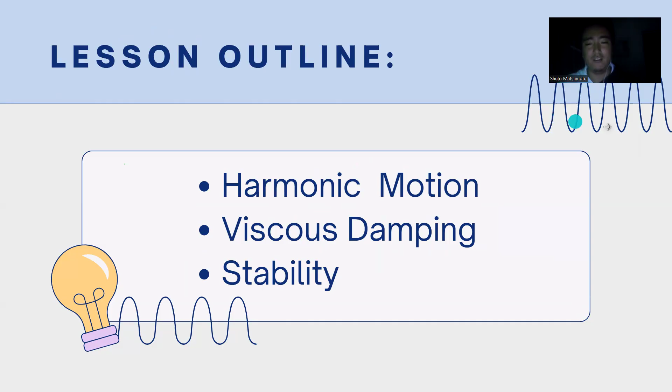Hi, I'm Gail, and I will be presenting about harmonic motion. Since the previous group already gave us an overview of what harmonic motion is, for this part we'll go more in depth. We'll look into how it actually works, how the main quantities relate to one another, and how different systems like spring mass, pendulum, and torsional system are all connected through the same principle.

Harmonic motion is a type of periodic motion. That means the object moves back and forth along the same path repeatedly. The most important part is the restoring force, since it always tries to bring the object back to its equilibrium. The force is directly proportional to its displacement, and it acts in the opposite direction. Because of that, the motion becomes sinusoidal, where it follows a smooth wave pattern, just like a sine and cosine curve.

Next, we'll see the relationship between displacement, velocity, and acceleration. These three quantities don't peak at the same time. When displacement is at its maximum, the object stops for a moment, so velocity becomes zero. But when velocity is maximum, the object passes through the equilibrium point where displacement is zero. Acceleration is always in the opposite direction of displacement because it's caused by the restoring force. The rate at which all this changes depends on the natural frequency: the higher the frequency, the faster the vibration.

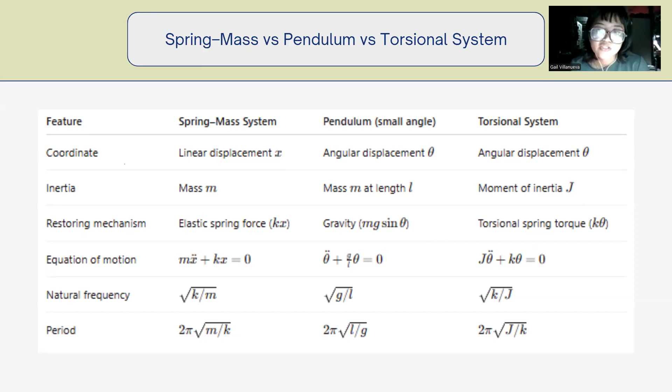For the next slide, we'll have an example problem, focusing first on the spring mass system. It says: consider a small spring about 30 mm long welded to a stationary table so that it is fixed at the point of contact, with a 12 mm bolt welded to the other end, which is free to move. The other details of this problem are written below. Suppose a spring with a constant of 857.8 N/m is attached to a mass of 49 grams, displaced by 10 mm and released. Gravity doesn't affect the vibration, it only changes the spring position. The vibration itself depends only on the mass and stiffness of the spring.

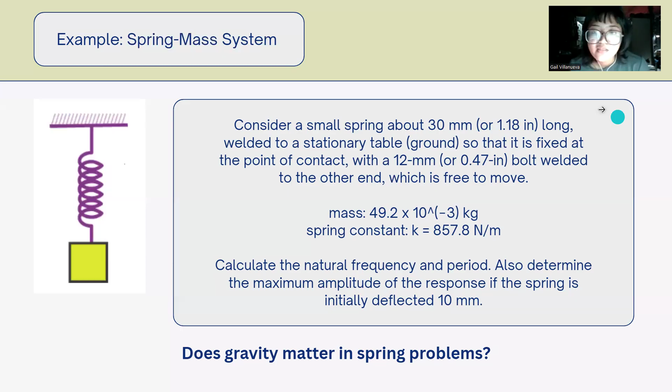On the next slide, you'll see the equation where we get the natural frequency of 132.04 rad per second, or converted into hertz, 21.01 hertz, meaning it completes 21 vibrations per second. The period amounts to 0.04 seconds, and there are the amplitude and the phase. For the equation of motion, we write displacement equals 0.01 times the quantity of 132.04 t plus pi over 2.

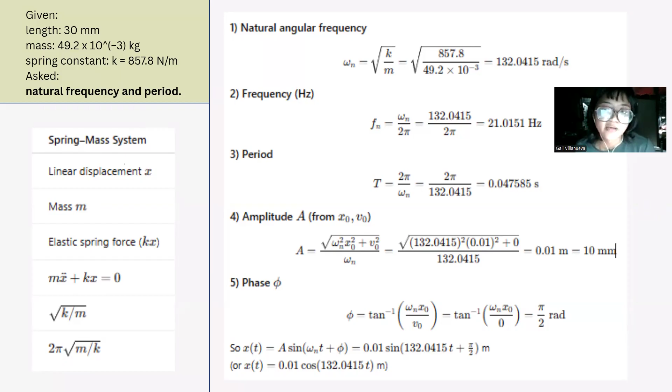On the next slide, we differentiate the three equivalent representations of harmonic motion. First is the exponential form, which is useful in advanced engineering analysis. The second is the amplitude and phase form, the most intuitive and commonly used form. Lastly is the sine and cosine form, which shows the motion as the sum of sine and cosine components. All of these represent the same physical motion, just expressed in different mathematical perspectives.

Viscous damping will be presented by Julia.

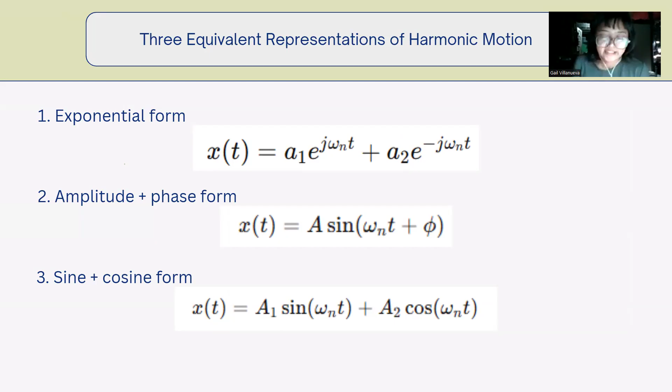Viscous damping is damping that is proportional to the velocity of the system. The faster the mass is moving, the more damping force is resisting that motion.

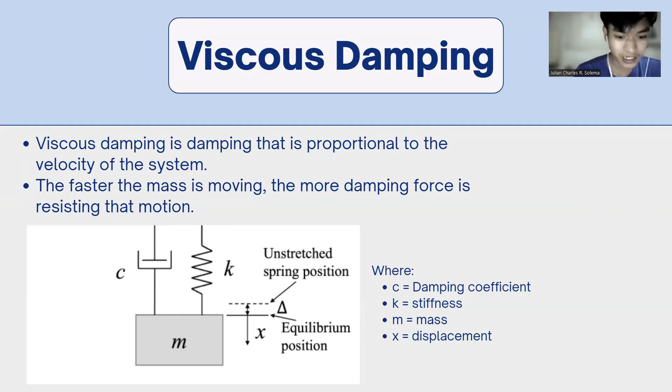So for linear viscous dampers, damping force is linearly proportional to velocity. So meron tayong equation na F is equals to C X dot. So F is damping force, C is damping constant, X dot is yung velocity of the mass.

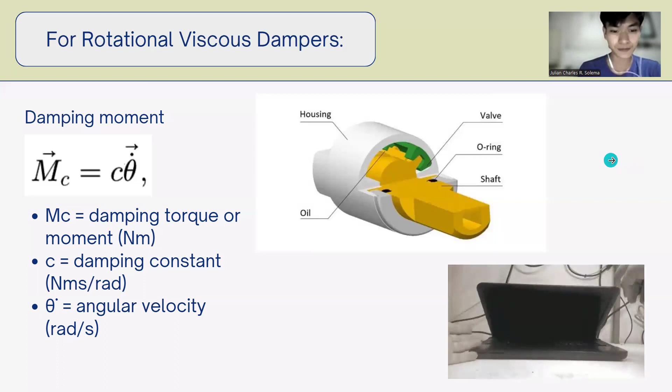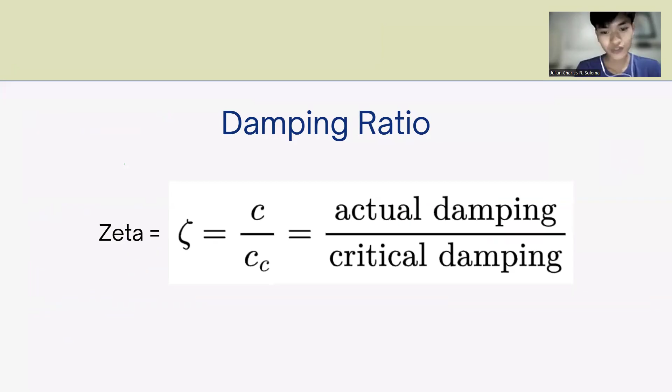So for damping ratio, ang equation dyan is zeta, which is ayang symbol na yan. Zeta is equals to actual damping over critical damping. Next.

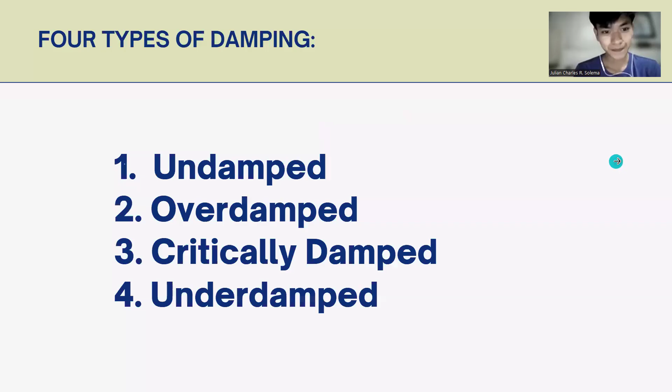So meron tayong 4 types of damping. First is undamped, overdamped, critically damped, and underdamped. So for zeta is equals 0, undamped yun. So undamped systems oscillate about the equilibrium position continuously unless some other force is applied.

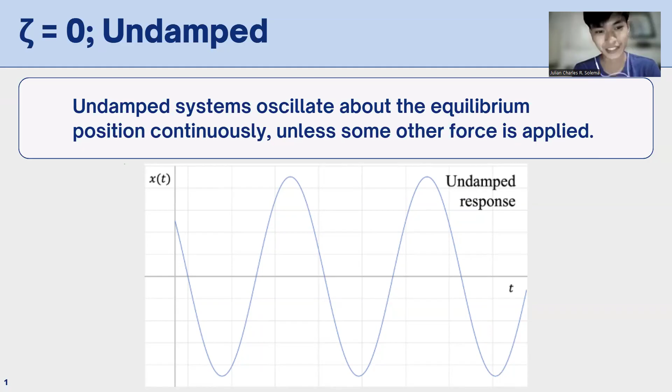Zeta is greater than 1, overdamped. Overdamped systems move slowly towards equilibrium without oscillating. So next, may example to.

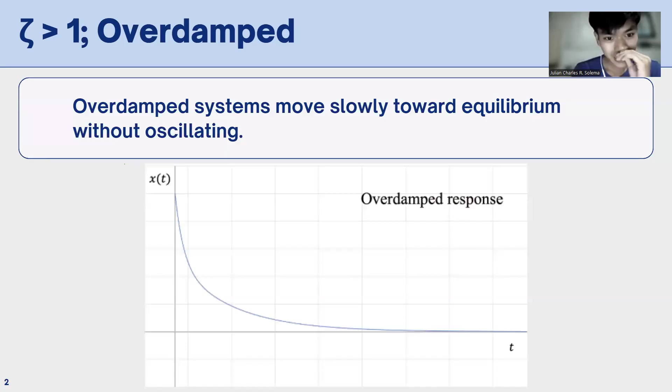Next pa. Yan, so pag zeta is equals to 1, critically damped systems will allow the fastest return to equilibrium without oscillation. So same lang siya dun sa overdamped, pero ang pinagkaiba dito is critical. So parang instant yung damping response. So next yung example.

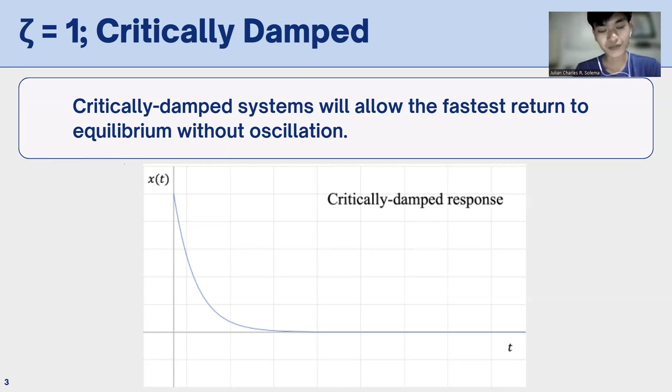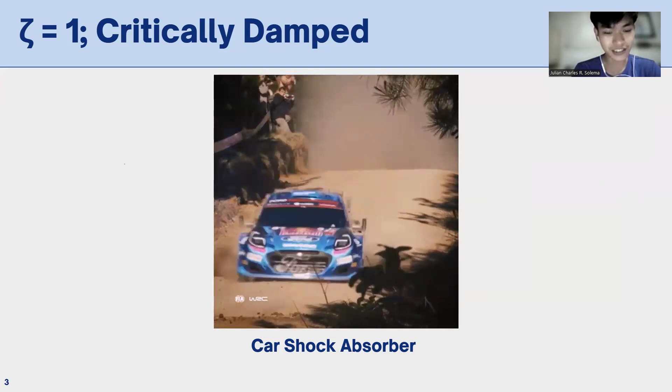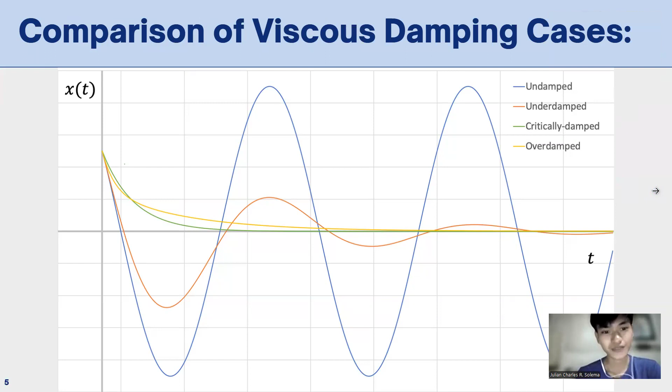So I'm Shuto. So first is what is mechanical vibration? So the mechanical vibration refers to the oscillation of a mechanical system around the equilibrium point. So we have the various factors. First is the rotating or reciprocating machineries.

So the example of this is the engines or the motors, which is naikot siya, which causes vibration. Then impact forces, this is obviously the hammering or drilling or the shocks. It also causes a vibration. And fluid flow.

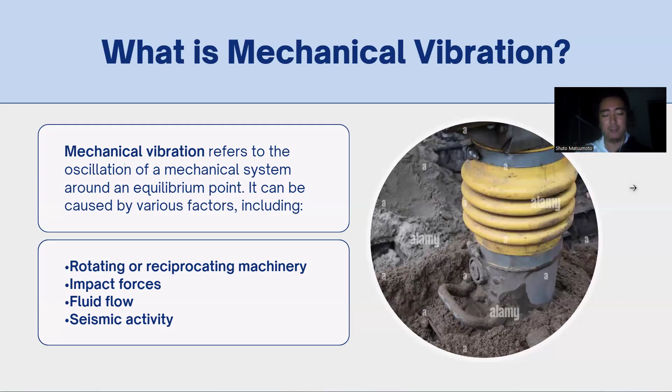It causes the ground to shake. Then it affects the machine that we have or the place that we have. So it causes a movement or vibration. And then, so why is vibration stability important?

So first is by analyzing the vibration, we learn about the safety causes or yung mga dangers na pwede nating makuha. Then preventing damage, so it is connected to the safety, which is by knowing what causes the vibration or the stability. Pag kasi masyado tayo unstable, then yung machine or yung gamit is masyado gumagalaw, then masisira lang po siya.

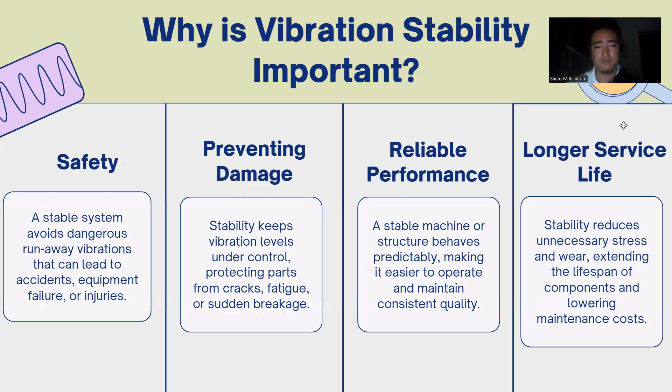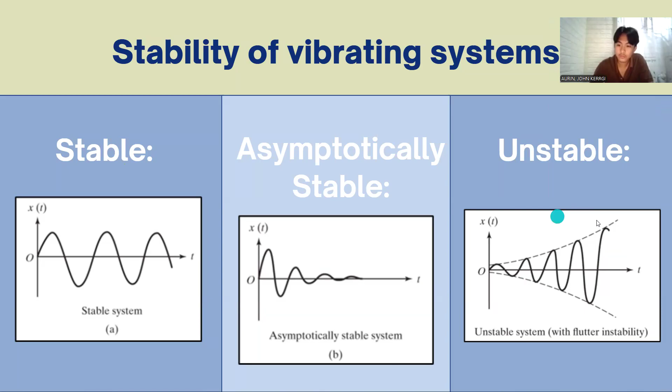My name is John Kerrgi Aurin. Now let's proceed to the stability of vibrating system. Ito yung mga classifications para masabi natin ang isang bagay ay stable or hindi. First is yung stable system. Next slide.

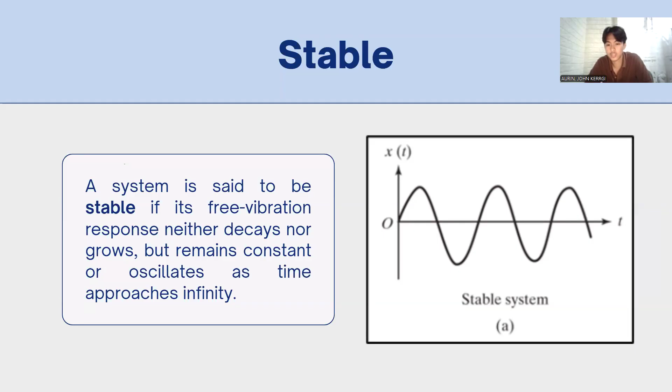Stable system. A system is said to be stable if its free vibration response neither decays nor grows, but remains constant or oscillates as time approaches infinity. Para mas maintindihan natin, magbigay tayo ng example.

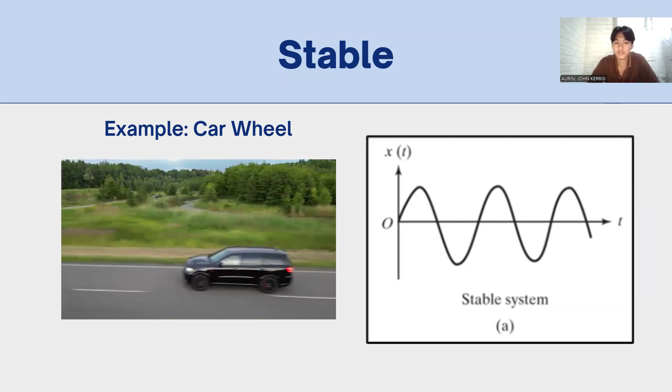Imagine a perfectly balanced car wheel. Even if it vibrates a little, the vibration stays the same. It doesn't grow or die out. Para lang siya nagdadrive ka sa isang highway with proper aligned wheels. Sa madaling salita, constant lang yung vibrations nito.

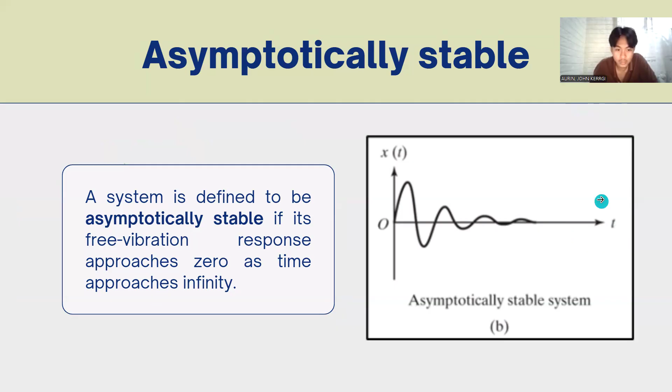Next is yung asymptotically stable system. A system is defined to be asymptotically stable if its free vibration response approaches zero as time approaches infinity. Example, yung kotse mo ay aksidenteng napadaan sa pothole or humps. Okay, drawing natin.

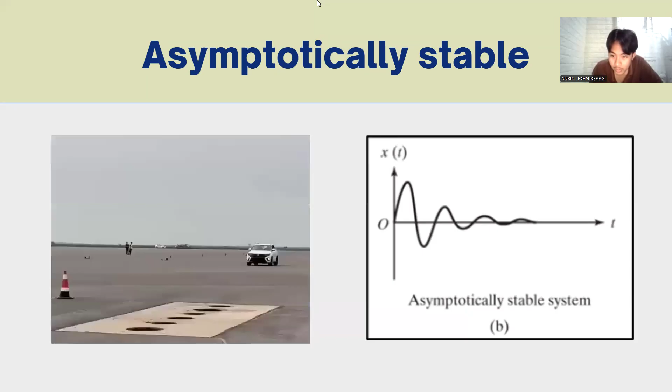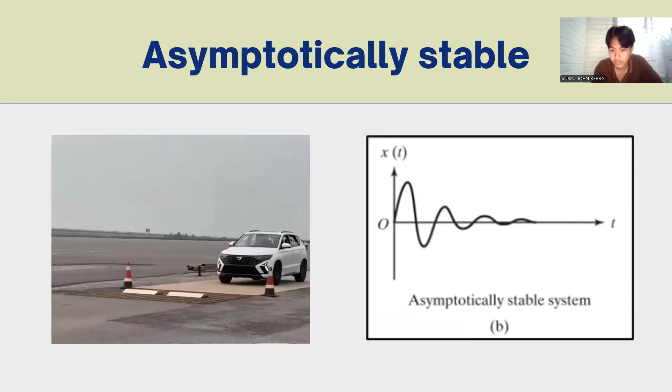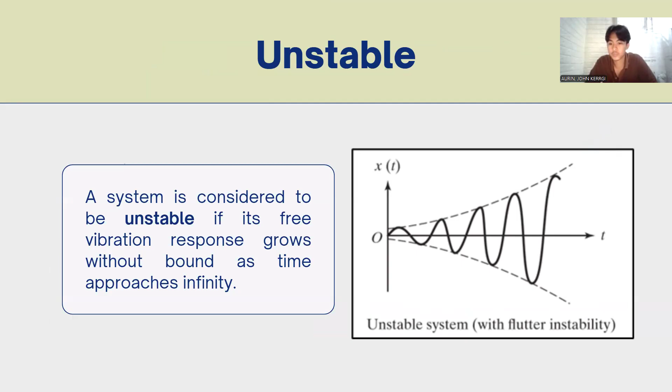Third is yung unstable system. A system is considered to be unstable if its free vibration response grows without bound as time approaches infinity. Example,

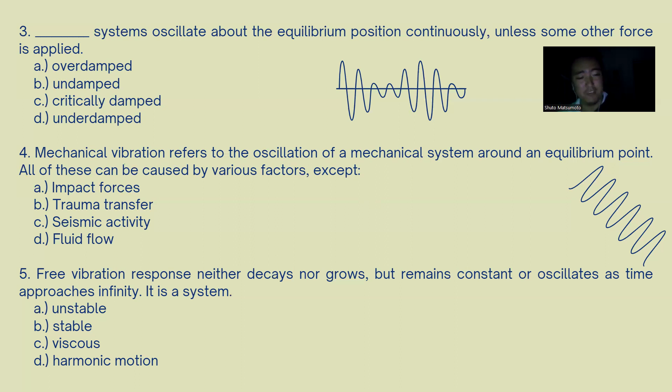Then 5, free vibration response, it neither decays nor grows, but remains constant or oscillates as time approaches infinity. So this is a stable system, not unstable, kasi neither decays nor grows but remains constant, so it is stable. So that is all for our report. Our topic is free vibration and our group is group 3.